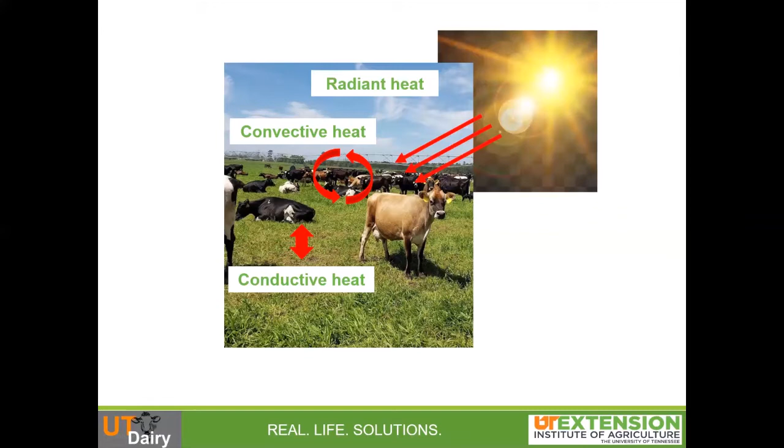So if we're looking at how animals regulate, we talked about how they accumulate heat. Let's talk about how they get rid of it. First one is conductive loss, exactly what we talked about before, right? If this resting surface is cooler than her overall body temperature, heat is going to move from the cow into the resting surface. The one we usually think about for this, like I said earlier, is sand, because it doesn't hold a whole lot of heat.

Some of the research we did in compost-bedded pack barns also showed us that the surface temperature of the pack was 1 to 2 degrees cooler than the ambient temperature in the barn. And that's because there's evaporative water loss occurring right at that bubble, so at that top of the pack, which made it a little bit cooler. So it was experiencing evaporative cooling, which in turn then could theoretically cool that cow that was laying on top of it.

The next one is going to be respiratory loss. And we usually think about that when we see that heavy open mouth panting that these ladies are doing. But even breathing out naturally is the main way that these girls are going to lose heat. There's another reason why we want to think about not overcrowding during the summer. Because if she's breathing out to try to get rid of more heat and the air she's breathing in is still hot because those girls are bunched together or we don't have fans, we don't have adequate air movement, it's not going to cool her as effectively as it could be.

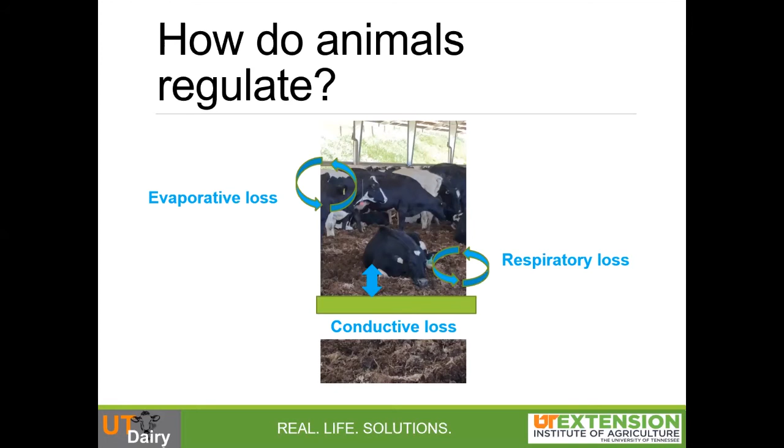The last one we're going to talk about is evaporative loss, and we'll get more into the sprinklers and things like that at the very end of this presentation, but that's what we generally think about in Tennessee or in most of the Southeast is evaporative loss due to moving wind over those cows' back and evaporating that heat off of her, or literally wetting that coat down all the way to the skin and force drying her, taking away that heat with the water as it evaporates.

We have some main signs that we want to look for, and I'm going to try to make this as interactive as possible, and we might stop after a minute if nobody responds in the chat, so respond at your own peril. We want to look for heat stress or stagnant air. One of the first things that we want to look for is air-seeking behavior.

So I guess show of yeses or nos, who sees air-seeking behavior in this picture? Seeing some yeses, lots of yeses. Awesome. So what I'm looking for is those noses that are all the way out of the pack. And I know when I look at it the first time, I don't see quite as many because I'm focused on these girls right here.

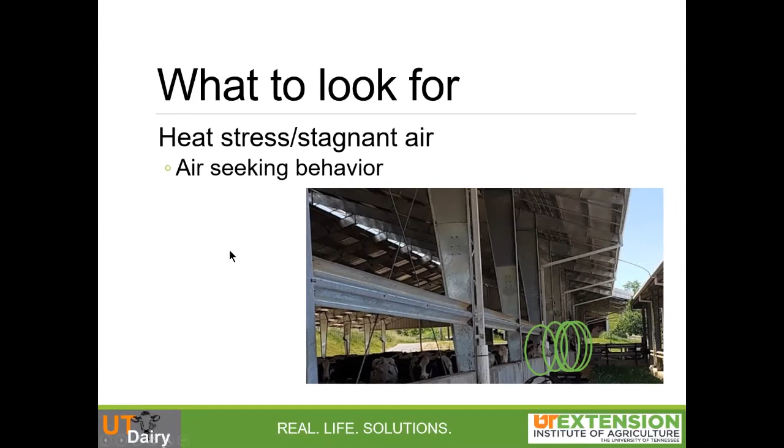If I look down the entire length of the barn, even though the barn is nice and open, I can see 6 to 8 girls that are sticking their noses out of the barn looking for fresh air or looking for a cooler environment. Next thing is our traditional one, and we're looking at panting.

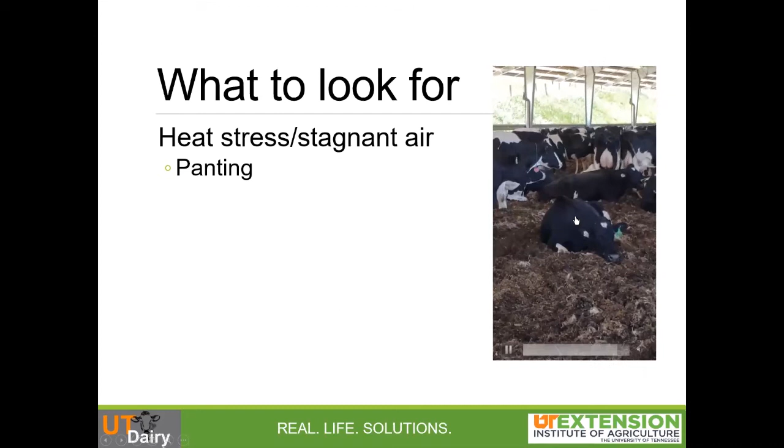And in this video, what you're gonna see is not the heavy open mouth panting. What you're seeing is an increased respiration rate. So watch the rises and falls of her side as she's breathing. You can see some of the other girls don't seem to be experiencing heat stress as much, but this girl is definitely breathing at a heavier rate than she would normally, so she's probably experiencing heat stress.

Some other things we can think about are standing in stalls and perching. Now, this one is a little bit confounded with whether or not our stalls are actually the right size. So if our stalls are a little bit short or they're a little bit narrow, we tend to see some of this behavior anyway. But if the majority of our herd is standing up or perching in stalls, what they're trying to do is expose more of their overall surface area to air to get that cooling effect happening.

So I do have a quick little poll for you. And my question is, when do you all think heat stress happens? And I'm going to launch the poll. And please respond. Y'all should be able to see it now. There's 4 options. I'm going to go ahead and end the poll and see if I can share the results with y'all. So hopefully y'all can see that right now.

And we have a pretty clear winner, which is when temperatures are above 70 degrees, which is awesome. We had a couple thinking above 90 or above 80. And I'll tell on myself a little bit, even the temperatures above 70 isn't necessarily true for the area in which we live, because what we're really doing is looking at the temperature humidity index.

So when we think about when cattle actually experience heat stress, it's not only dependent on the temperature that we're experiencing, it's also dependent on the relative humidity we have in our area. And if you look at the weather data for Tennessee, our lowest really ever goes down to 70% humidity. So right off the bat, we can already see that this chart only goes down to 72, but we're probably experiencing heat stress at a lower level of maybe 67, 68.

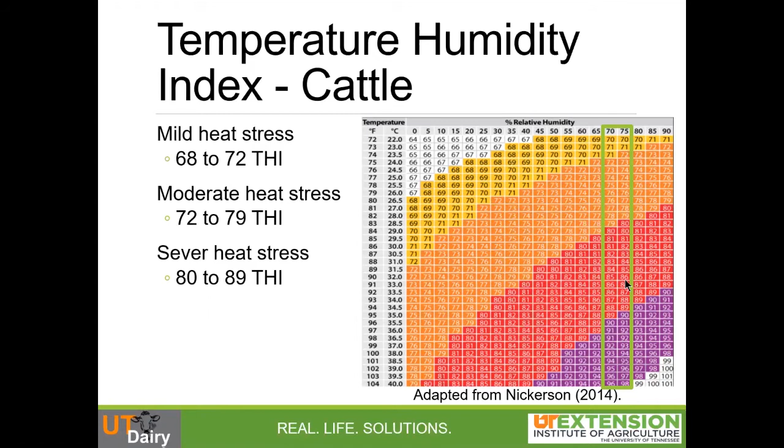The trick that we can fall into as humans is when we go outside, we'll want to wait to turn on the fans until we feel uncomfortable, which is why we might say not until 80 or not until 90 degrees or not until it's actually in the summer. But we don't really start to experience those same issues with heat stress because our temperature humidity index is overall higher than what our dairy cows experience.

I know a lot of y'all know that already, but what we're seeing is at that same level, 70, 75%, we're not really even into a caution level until we get up to 80 degrees outside. And we're not into extreme caution until we're in the upper to mid 80s. And then danger is not until we're getting up into the high 80s, low 90s, and extreme danger not until we're getting close to 100.

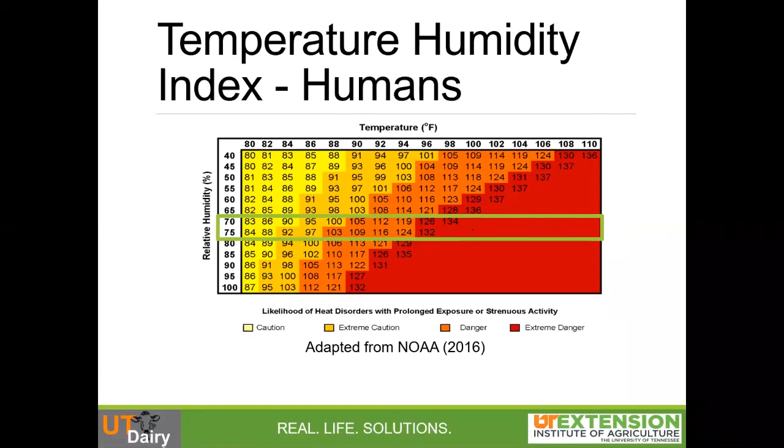And that's with that relative humidity above 70. So if we turn on fans based on when we feel uncomfortable, we can actually ding our production quite a bit by letting those cows experience moderate to mild heat stress for quite a long time.

Most of them just do temperature, but if we can keep this information in mind and consider turning on our fans around 65 or 70 at the very, very least, we can make sure that we try to limit those heat stress impacts in Tennessee.

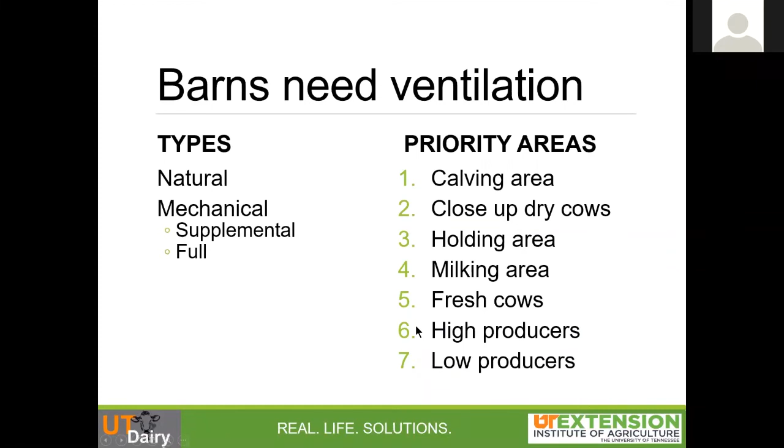Our next one is going to be the holding area, because we're talking about a very rapid development of heat stress when all of those animals are bunched together in the holding area. Next one's going to be the milking area or the parlor, then our fresh cows, then our high producers, then our low producers.

Natural ventilation is called natural for a reason. We're relying on the free movement of air throughout a barn. And that means high sidewalls, so 14 to 16 foot high down here where we are. Ridge vents are a must. We want a 3-inch opening for each 10 foot of roof width and a minimum of 12 inches.

So the smallest we ever want to go, no matter which structure we're in, is a foot, because we want that air to be able to adequately escape. And we'll go over some types of ridge vents and things to be mindful about when installing one or retrofitting in a few slides. And our roof pitch, we want it to be at least a 4 to a 12.

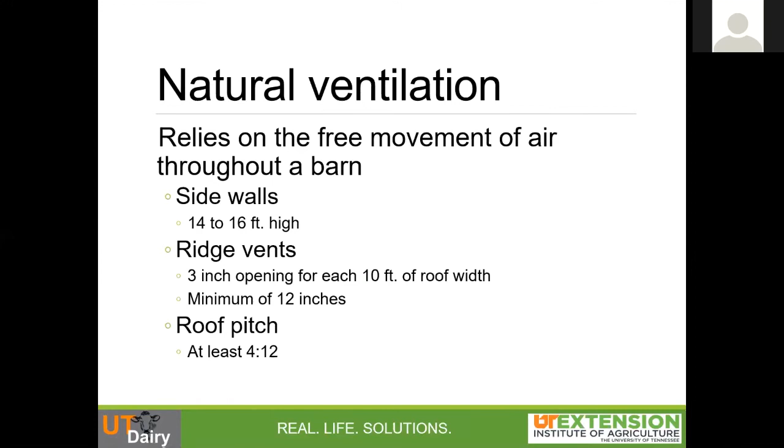The reason we want a steep roof pitch is we want to get that chimney effect. We want that hot air that we know is rising off of our cows into our barn to have a quick, easy escape, to let new, fresh air into the barn. So we're really wanting a 2 to 4 mile per hour air movement through the barn.

And we know from Kentucky data for sure, and for Tennessee data, I would assume, I did look for it, y'all, I had difficulty finding it, I'll keep looking, that throughout the year, natural ventilation, if our barn is sized right, can easily meet the 2 to 4 mile per hour air movement from the winter and into the summer. And we really want to promote air exchange through the barn.

So here we have my crude barn drawing, and we have our happy little cow that's lying down and chewing her cud. What we want to happen is on these nice high sidewalls, air is going to move into the barn continuously, hot air is going to rise and move out of that ridge vent continuously. This is our ideal situation.

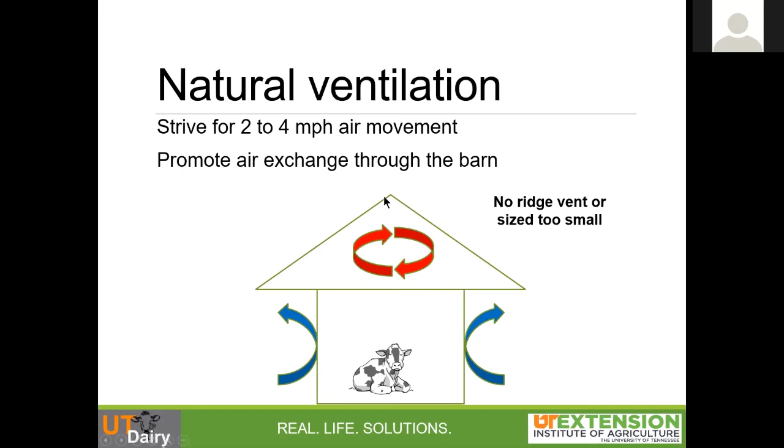Our unideal situation is not having a ridge vent or having a ridge vent that's sized too small. If that ridge vent is sized too small, it creates a choke point. So we'll still get some air that's escaping, but we won't get anywhere near as much. If we don't have a ridge vent at all, we don't exist in a vacuum, right? So some air exchange will happen, but new air cannot come in to take the place of the air that's in the barn until the air that's in the barn moves out.

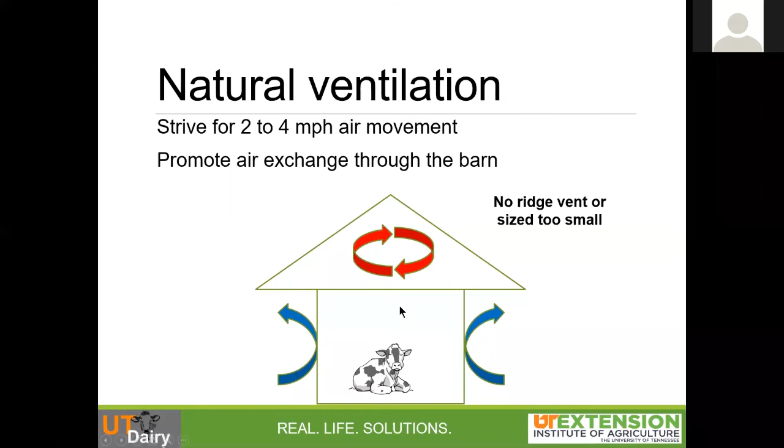So lack of a ridge vent, having a shallow roof pitch, all of these things can be really big issues in dairy barns, especially in retrofit barns. Ridge vents, I'm a bit of a ridge vent nerd. I'm gonna fully tell on myself there. I think there are lots of really cool designs and lots of really interesting ways to use them.

The three main ones that we tend to see in our area are an open ridge, so nothing at all, a ridge cap or a doghouse, or an overshot roof. We'll see overshots quite a bit, and there are some big problems we can see with overshots that we'll talk about in a minute. So with an open ridge, it's exactly what it sounds like. It's an opening that is cut into the top of the barn.

And yes, sometimes we'll get precipitation falling into the building, but generally in a barn that is well stocked, so stocked at capacity, not overstocked, there's enough buoyancy from the heat that those girls create and enough air movement that rain doesn't just continuously stream into the building. So remember, we don't exist in a vacuum, right? So that air is constantly moving out of the barn to keep all that precipitation from going straight into the barn.

There was an alternative to this, which had a gutter running along the bottom to capture any water and take it out of the barn. I have concerns with that in the same way that I have concerns with things like a ridge cap or an overshot roof. Remember, we said we needed at least 3 inches of opening for every 10 foot of roof width, right? So that doesn't just apply to this opening right here. That applies to this opening, that applies to this opening right here, and these openings as well.

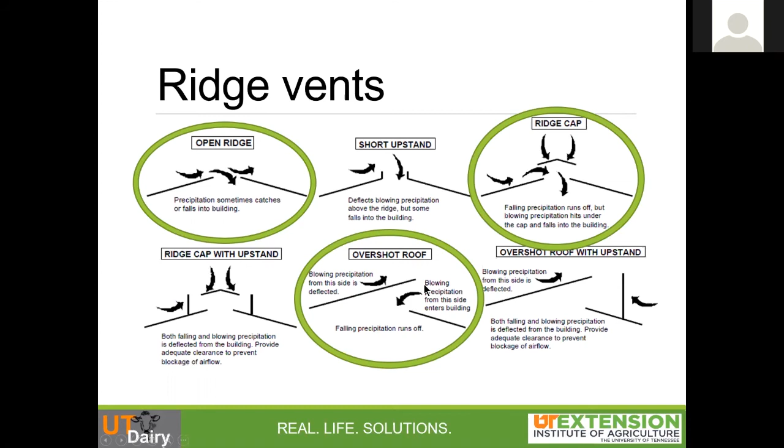And what I mean by that is if we are up in the mountains and we know that our predominant wind direction always comes from the west, for this example, we're good, right? The wind is going to blow over here, help take this air away and move it off of the barn. Well, what happens on that day where instead of blowing in from the west, the wind decides to blow in from the east? Now we have air coming from this side that's going to create an additional barrier, basically, to air escaping from the barn through this opening. And that's what I mean by dependent on a prevailing wind direction.

And it's also the easiest to create choke points. Like I said, that bottom lip will come up to meet the top, or that top will be shifted too far over and create a choke point of a couple inches, either on the bottom or the top opening.

We talked about placing fans where they are needed in our priority area. I'm going to add a little bit more detail here onto our lactating cows. The first place that we want to put it, if you're prioritizing where to put fans, is going to be over the feed area. Again, because we bunch cows closely at the feeding area, we're intending to have them line up side by side by side and to stand there for a pretty big length of time.

Our next place to put them is going to be the resting area. Just because we expect them to have a little bit more space there, we don't expect the resting area to be completely stocked all of the time. That's why we get away with things like overstocking. And we potentially have some conductive cooling there as well, particularly if we have something like sand where those cows are laying down on a cooler surface. There are lots of different options for fans.

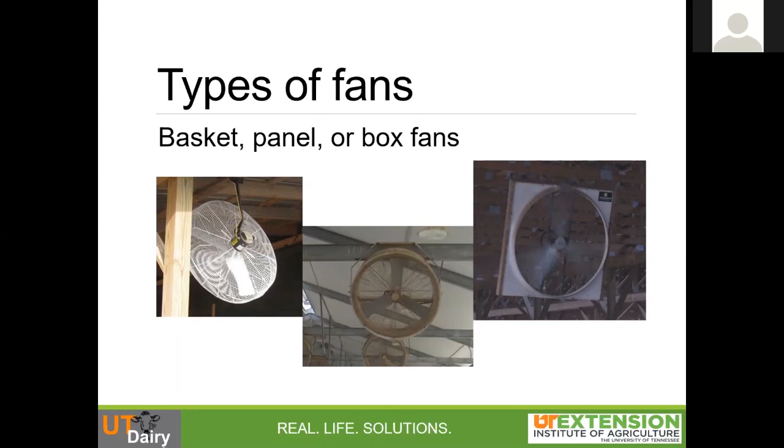We have basket fans, panel fans, or box fans. And they all have pretty much similar attributes as far as the job that they will do in a barn of any kind. But they do have some spacing rules and some placement keys.

We recently just published this extension pub, Mechanical Ventilation, Making It Work for You. It was myself, my previous mentor at UK, and a BAE engineer, Dr. Joseph Taraba. And we go into a lot more detail about different types of fans, whether or not we want to have guards, and some issues that we can get into with them as well. So that's a resource that I can send out to y'all later. I'll send it out with the update after this meeting.

But the main key is we want to place those fans 10 times the blade diameter. We don't really want to go more than that. And we can maybe go shorter depending on the issues that we have in our barn, but we don't want to go further than 10 times the blade diameter. So if we see something like a 3-foot fan, it can be 30 feet in between fans along the length of the barn. So one fan in front of the other fan in front of the other fan, 30 feet.

In between individual fans, so side by side, we don't want more than 6 to 8 feet between those rows. So if we're looking at something like a 3-foot fan, we're probably thinking 6 feet. If we're looking at a 4-foot fan or greater, we're probably looking at 8 feet between individual fans. And we want to put those at a 15 to a 20 degree angle pointing down towards the cows.

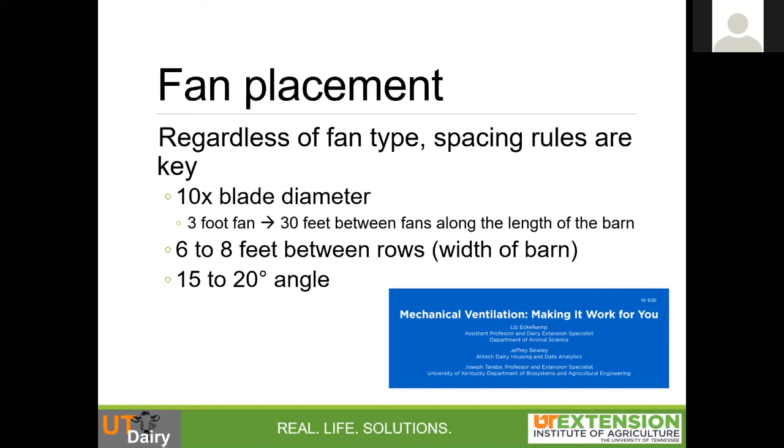And the reason we want to do that is we want to make sure that effective air movement is hitting those cows and that the effective air movement from one fan stops where the effective air movement from the next fan begins. And that's where we'll see these spacing keys really come into play. So fans don't just blow air in one direction, right? As those fans blow, that air will start to spread out in a cone, getting further and further apart and having less and less velocity as we go out from that initial fan.

So kind of like my little squiggly line that I drew here. In order to effectively cool cows, we want to have a tight cone hitting those animals. So we want that next fan to come into play where that tight cone of air ends. So just because we stand in front of a fan and we can feel air movement maybe 20 to 30 times the diameter of that fan, that doesn't mean we're still getting effective air movement.

And if we look at our cows, they'll tell us that. They'll all bunch really close to a fan, or you'll see really big dead spots in your barn where they're making sure they stay in that effective air movement zone. And to kind of show y'all this, I pulled this from that pub I mentioned earlier. So we have a bank of fans coming this way, and this is in a holding pen, so these cows are crowded together. This panel right here is showing us the ambient air temperature that these cows are experiencing.

This picture is showing us the air velocity that those cows are experiencing. So blue is low and yellow is high across both of these pictures. The closer we are to the fan, the lower the ambient temperature is, and the higher the fan velocity is, that red or yellow. But you'll see pretty quickly after we hit these 4 cows, our velocity drops very rapidly down into the blue zone. Because again, that air doesn't exist in a vacuum, and it's just encountered these barriers in the form of cows.

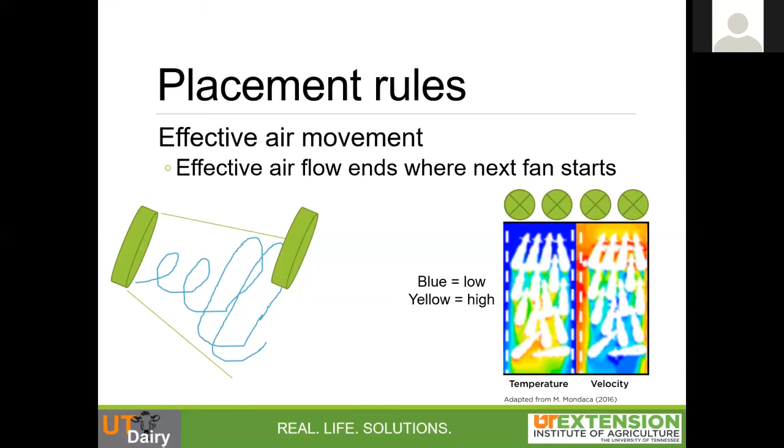So whether you have a shed in that area, or if you're a robotic producer and you have robots that are in the alleyway that are blocking air movement, you're gonna see the same phenomenon where the air will be moving fine up until that barrier, drop completely off on the back end, and those cows on the other side will be experiencing heat stress, even if the cows on the front of it are not. So when we're putting those up, always common sense check. Look for additional barriers, remove them if you can, but make sure you check for those.

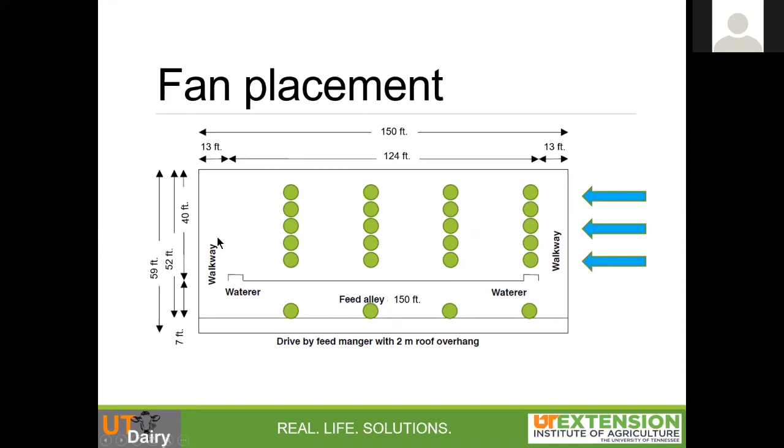This is a schematic of an overall fan placement. Yes, this is a compost barn, very similar to what we would see in a freestall, except we'd probably place them along the actual stalls and not just in series. But we're assuming this is our predominant wind direction. So starting here, we're gonna put those banks of fans. These are those 3-foot fans. So 6 to 8, about 6 feet in between them here, 30 feet to the next row, 6 feet between them here, 30 feet to the next row, so on and so forth. And we have those same spacing keys on the feed alley.

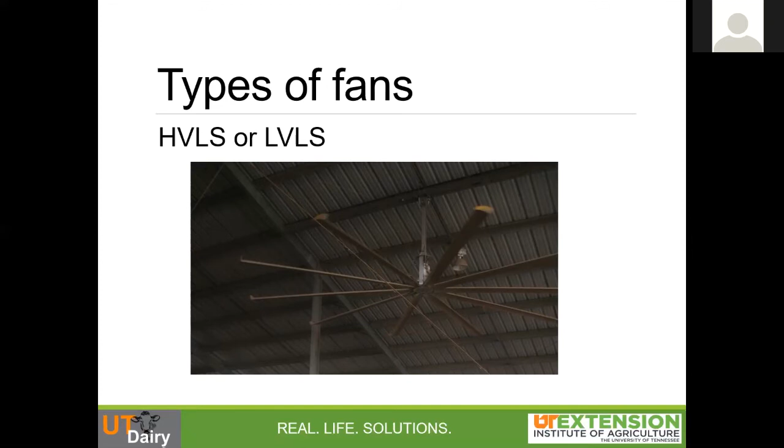I get questions about HVLS or LVLS, which is high volume, low speed, or low volume, low speed fans. We don't see many LVLSs in the dairy industry. We see mostly the HVLSs, and the one that we probably think about most in Tennessee and Kentucky would be the Big Ass Fans. For those, our keys are 2 to 2.5 times the diameter of that fan blade. Now this is much narrower than we were originally told when we started rolling out some of these HVLS fans. And that's simply because we know they move air really well directly below them, but they don't throw air around them all that effectively.

So air will come out in that pretty tight cone right here and cool that area directly around the fan. But if we had done the previous suggestion of 2 to 3 to a side, so say we had a fan here, a fan here, and a fan here, and these 2 middle ones were missing, what we would see is cows would bunch underneath this fan, underneath this fan, and underneath this fan. And particularly in a compost bedded pack barn, that creates a lot of additional moisture and a lot of wet spots in the barn. It also has the other unintended consequence of increasing radiant heat load from cow to cow and potentially fly load as well.

We don't normally put HVLSs in a way that they could still reach the feed alley. So with these in particular, it is crucial to have supplemental cooling along the feed alley, unless you're feeding directly underneath an HVLS fan. They just don't throw air far enough. And we normally have some kind of barrier here, like a retaining wall or waterers or gates, something like that, that would interrupt airflow.

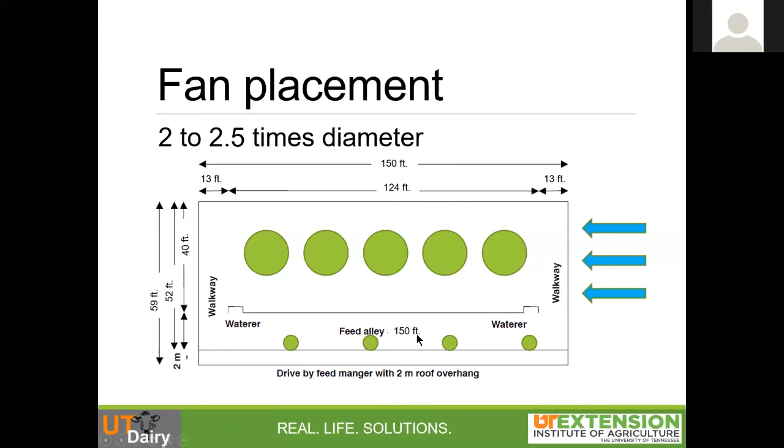If we think about enclosed barns, I'm just going to talk about these briefly, and then we're going to talk about sprinklers. If you think about a tunnel ventilated barn or a low profile cross ventilated barn, they're both different types of tunnel ventilated barn. The difference with these is they rely exclusively on fans for air exchange and cooling, and these became very popular in cold stress areas, so places like the upper Midwest, the Northeast, where a lot of our housing designs come from. And in some of those areas, we'll also see the use of evaporative cooling cells.

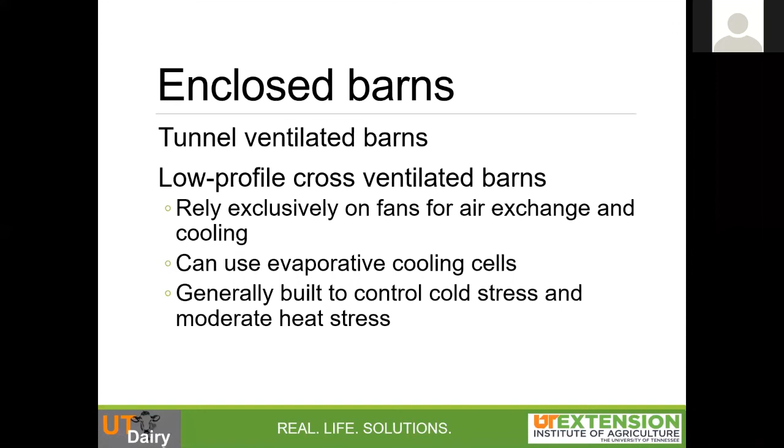The trick with an evaporative cooling cell is water has to evaporate to create that cooling in the air. And we live in a very humid environment. So with that humid environment comes a lot of issues of actually increasing our heat stress on that animal if we use an evaporative cooling cell and we increase humidity in the barn. We talked about earlier that our natural relative humidity tends to be between 70 and 75%. Adding more water on top of that may not be as effective here. Sorry, I'll move on. Another thing would be picking up things like poor air quality as we move along the barn.

So pros, they're not dependent on geography or wind direction because you're not relying on natural ventilation at all in this scenario. You're specifically relying on fans to bring air in and fans to move air out, or inlets to let air in and fans to move it the entire length of the barn. And you can provide a very controlled climate, particularly in a place where we experience a lot of cold stress, and you don't want the barn to freeze during the winter. And they can be fully automated.

Some cons are they're difficult to cool in high heat and humidity environments, specifically the humidity, because that air that comes in is the only air we're going to get along the entire barn. So we really need to ramp up those fans and increase air exchange dramatically during the summer.

Air quality can be a concern, again, because the only air coming to the barn is from a specific set of inlets. So that air is going to pick up ammonia, it's going to pick up humidity from cows breathing out all the way down the barn. So the air quality at the beginning of the barn can be dramatically different than the air quality at the outlets of the barn. And we often need additional fans or baffles to effectively cool cows.

So baffles push air back onto the cows. Some engineers are really pro-baffle. Some engineers are really anti-baffle. It really depends on your situation and how you manage it. Same thing with additional fans.

But I will say in the Southeast, if you're planning to use some kind of sprinkler system, and we'll go over this again in a minute, but I really want to mention it here. If you're using a sprinkler system in a fully enclosed barn in the Southeast, you really have got to have supplemental fans over the feed alley to drive that evaporative cooling. Because again, we'll feel great air movement down the center of that feed alley, but we won't necessarily have that same high movement over the cow level, particularly in a long barn.

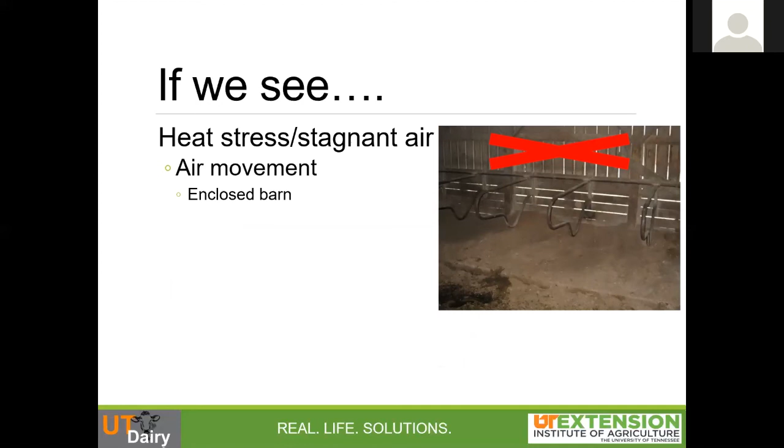So we're gonna go over some "if we sees," just real quick. For heat stress and stagnant air, we're really focusing on air movement. So if we have an enclosed barn, the first thing we wanna do is knock out any of this paneling that we can to really open the barn. The big thing I'm gonna say is if it's not structural, we probably don't need it. We need to make sure we have enough fans in the barn.

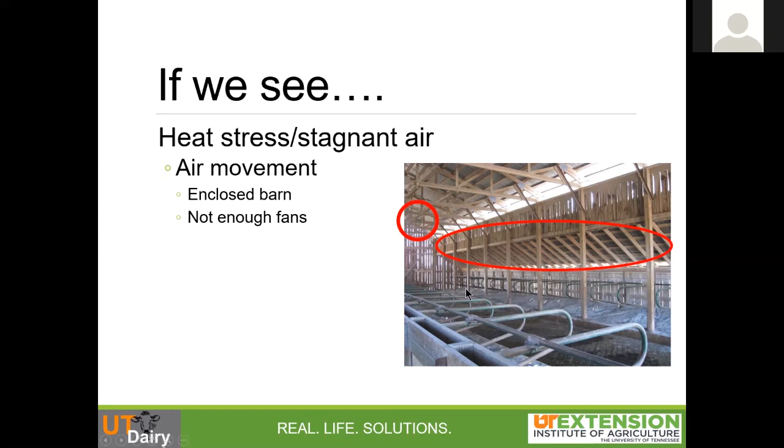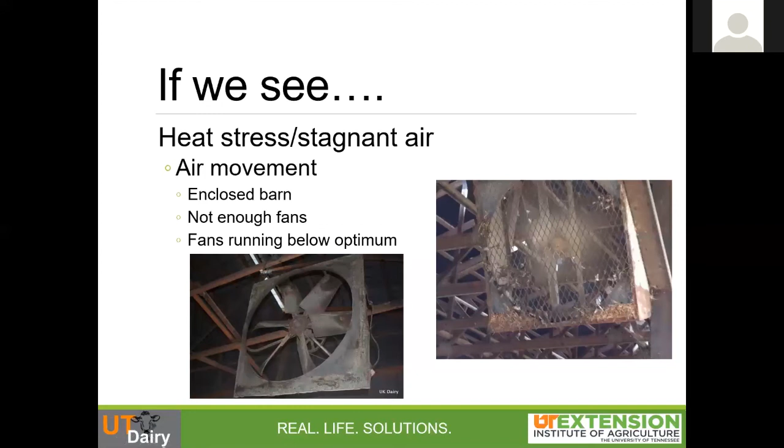I'm sure y'all have all seen a couple of these retrofit tobacco barns, but the big thing we need to remember is one fan is not sufficient to cool all of these stalls, and it's definitely not reaching these cows over here underneath the overhang. We need to make sure our fans are running at optimum. So broken fans, dust-covered fans, or fans filled with feathers and all kinds of lovely bird's nests, those fans are not running at optimum. So going in there and fixing them or cleaning them out can be really helpful and a really cheap fix to make sure everything keeps running smoothly.

We might not have an air outlet, and that's where we would think about putting in a ridge vent. Like I said before, that open ridge is going to be your quickest, cheapest option most of the time, as long as you make sure to take care of those trusses, because we don't want those to rot from any precipitation that does enter the barn.

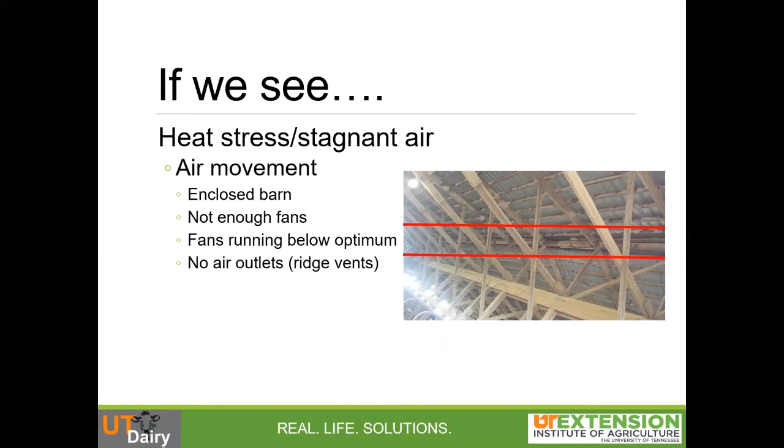And always, always, always common sense check. If you cannot feel the air movement at the cow level, which means crouching down to see where the cows would be, that fan placement needs to be addressed. Those cooling options need to be addressed.

All right, real quickly, we'll talk about the role of water in cow cooling because it's a big role that we play down here. And the first thing I'm going to talk about is the clean water difference. If we have dirty waters, and I know you're all rolling your eyes because you've heard me say this ad nauseum, the cows are not going to drink water. We talked about conductive cooling and conductive heating, moving from a liquid to another media. Cool water that those cows drink will cool their core body temperature.

We see it all the time in rumen boluses, when we're trying to track actual animal temperature. We'll get a big slug of water when they drink, and it drives that core temp down and messes with our data. So we know it really does happen. It really does have an impact. But if those cows are avoiding that water trough because it's dirty, we're not going to see that cooling effect. And we're also not going to see those benefits in production, reproduction, efficiency that we would from having clean water.

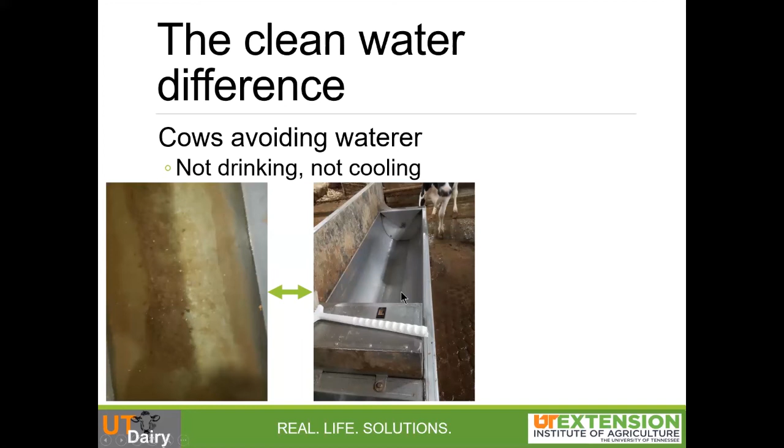So this is an easy dumper that, yes, I did roll up my sleeves and clean. It looked like this beforehand. It smelled fantastic. We went in there with a nice little white scrub brush, dumped it a couple of times, and got it back to its shiny new clean self. And I am not kidding you, 5 minutes later, if even that, this was the picture at the water trough. So of all the girls, there's only like 70 in this barn, we had a good 6 or 7 that were already huddled around the water trough trying to drink that clean water.

So can't overstate it enough, guys. Clean water really, truly does make a difference. Evaporative cooling is the other one that we work with. And the big key here is the water has got to completely soak the skin. We cannot effectively mist the air in Tennessee. It does not work here. Our relative humidity is just too high.

Places like the Texas Panhandle, New Mexico, Arizona, where they have a lower overall humidity, misting the air and cooling the air works great. But we don't have that type of ambient climate here. So we do not want to use misters in Tennessee to cool the air around the cows. What we do want to do is use a soaker with a large water droplet. And that's what we have that's ideal for high humidity, but we have got to combine it with fans. And this is why we have to combine it with fans.